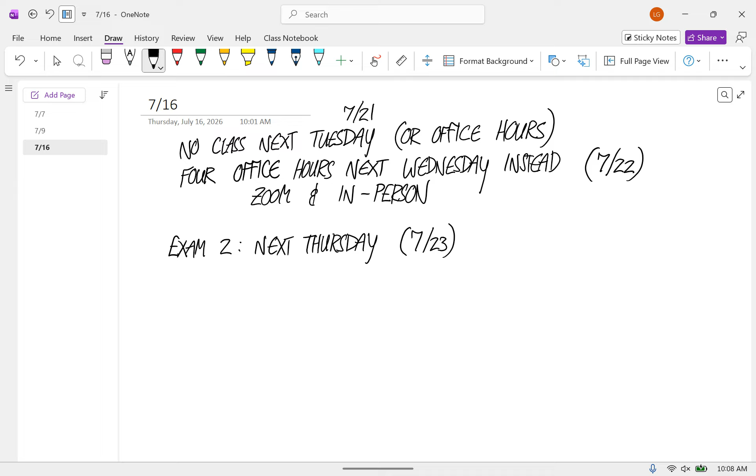So the first thing I want to do today is talk about the test, and I'm going to go through all the test questions. And then I want to take any questions you have on homework, go over any problems you'd like me to go over on the homework, and then we'll go through a bunch of example problems.

So exam 1, basically overall the scores were lower than I would expect on this. These are lower than usual. It seemed like what I saw most often was just people not putting in the time to absorb these methods as well as you should.

You really can't just think your way through this stuff. I'm giving you methods that are going to work for these problems, and what you need to do is just keep doing these problems and comparing your answers to the solutions until they match, basically. So I'm going to go through the exam problems. I'm going to do it in the method that I prefer. There are other ways to do it, but you can't just think your way through it. You need to follow some kind of method, so you might as well follow mine. The methods I'm giving you are specifically designed to get you ready to do the kind of problems I'm going to give you.

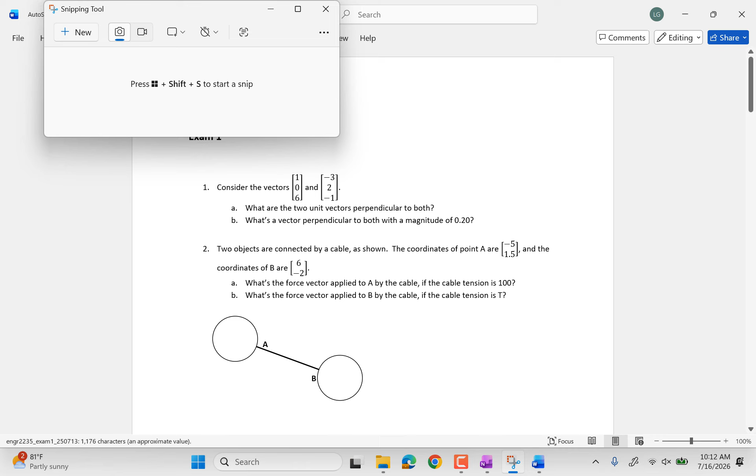Okay, so exam 1, number 1. Well, let me pull these up. So number 1 is just a straight vector question.

We want to find two unit vectors that are perpendicular to both of these. The cross product always gives you two vectors that are perpendicular to both of those, but the cross product itself isn't going to be a unit vector. In order to be a unit vector, you have to divide by the length.

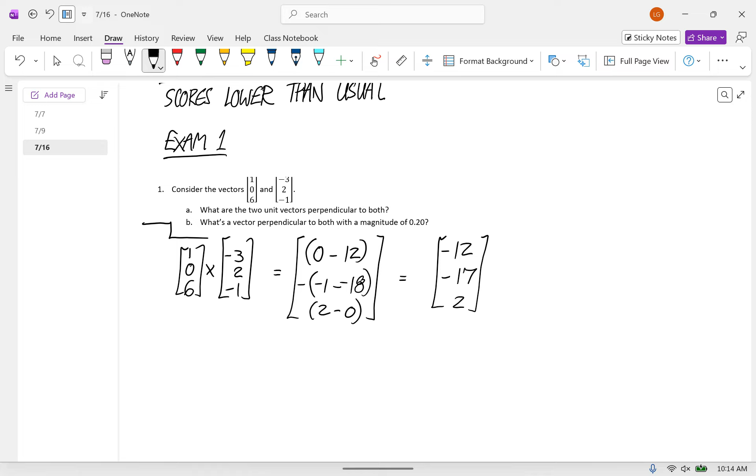So we have 1, 0, 6 crossed with -3, 2, -1. And so that is 0, -12. And then for the y component, -1 minus -18. And then for the z component, 2 minus 0. And so you get -12, -17, 2. Then I'll calculate the unit vector in this direction, and the two unit vectors perpendicular to both of these are this and the opposite.

Also, a lot of people just did the arithmetic of the cross product and got the wrong answer. Your calculators will do this calculation for you. I'd highly recommend, if you have a TI-84 or 86, entering the program given in that statics textbook, and it'll always do it for you—you never have to do it by hand. If you have an 89 or an Nspire, that product is in there, called cross P.

Okay, so the unit vector in this direction is negative 0.574, negative 0.813, 0.096. We want the two, so it would be plus and minus this. So the other one would be the signs of each component switched: 0.574, 0.813, negative 0.096. So that's for part A. And then for part B,

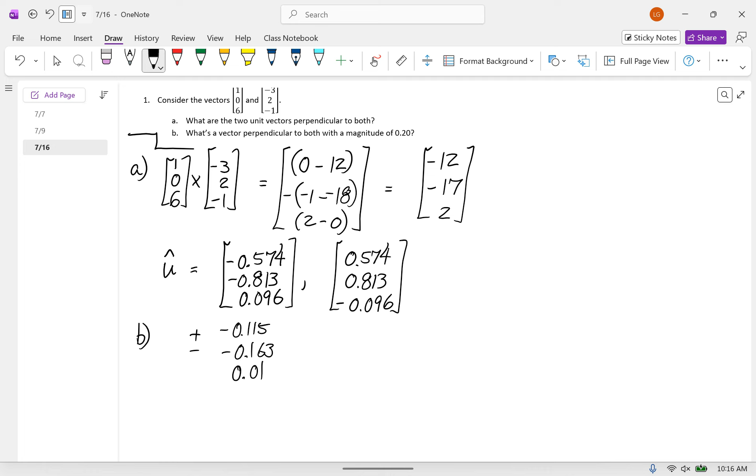And you get plus or minus negative 0.115, negative 0.163, 0.019. So that's number 1. Number 2,

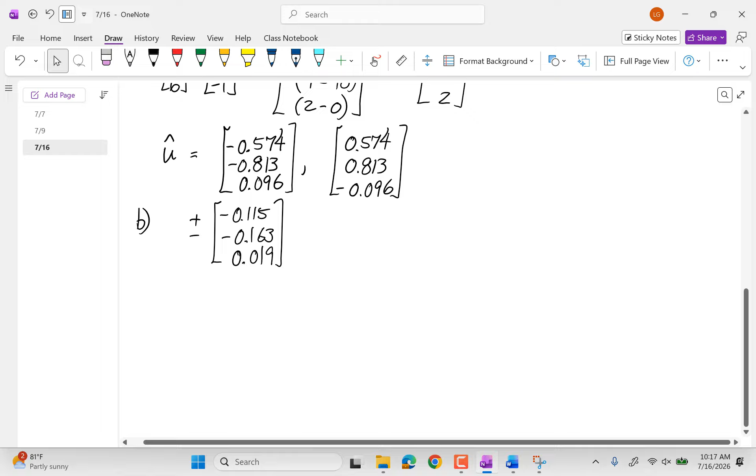we have these two ball things connected by a cable. And we're given the coordinates of the two points. So this point here has coordinates - this is just in 2D, just x and y coordinates. Negative 5, 1.5. And the coordinates at point B are 6, negative 2.

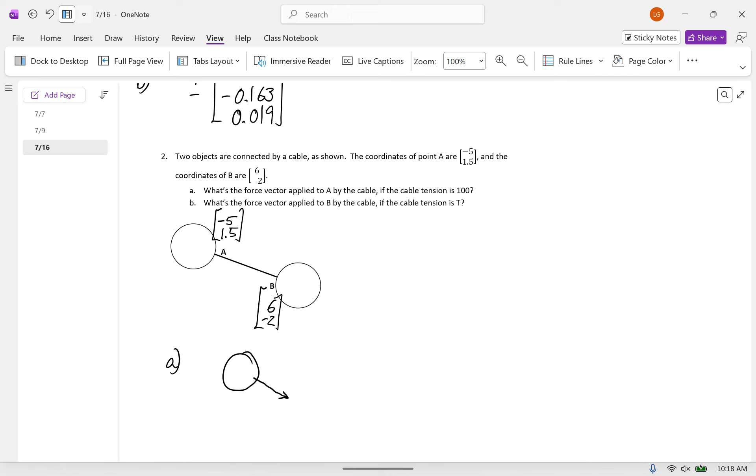And we want to calculate the force vector applied to A if the tension in the cable is 100, and then the force vector applied to B if the cable tension is some unknown T. All right, so for part A, a cable force is parallel to the cable away from the body. So, this way.

And so in order to calculate the unit vector in that direction, because we want the unit vector in that direction so we can multiply it by 100, we're going to go B, the destination, minus the starting point. So our starting vector is going to be 6, negative 2, minus negative 5, 1.5. So that's 11, and then negative 3.5. And if you think about the direction of that vector, it makes sense with the way that arrow is drawn. It's in the positive x direction and the negative y direction.

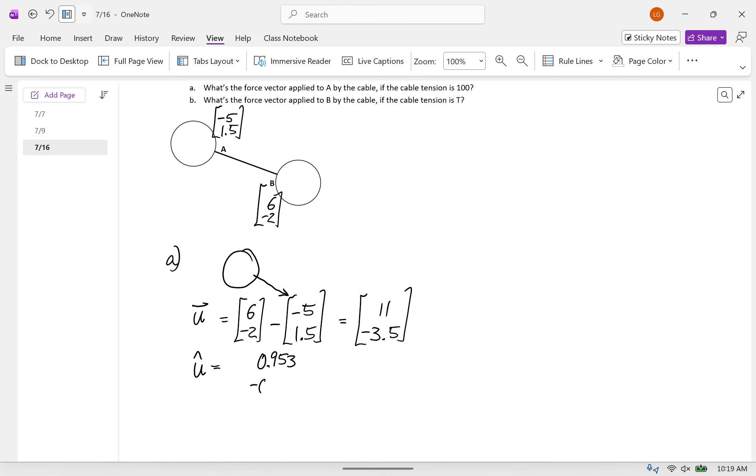And then a unit vector in that direction, divide by the magnitude. And you get 0.953, negative 0.303. And so the force vector that we're looking for here, it says that the tension is 100, so it's just going to be this multiplied by 100. So that's 95.29, negative 30.32. And this is in newtons.

By the way, about rounding, I don't care about rounding. I'm just checking to see that you do the steps right. So however you want to round it is fine with me. I know your chemistry professors will make enough of a big deal about significant figures that I can ignore it.

And then for part B, so now the cable tension is going to be T instead of 100. The other difference is we want the force vector applied to B by the cable, not to A. So this time our force vector is going to be in the other direction. It's still parallel to the cable, but away from the body.

And so our vector this time is going to be, well, if we're starting from scratch, the destination is that point A, -5, +1.5. The starting point is 6, -2. You also could recognize that this is just the opposite unit vector of the other one, and you could skip some of this and just multiply the components by -1. So this gives you -11, +3.5.

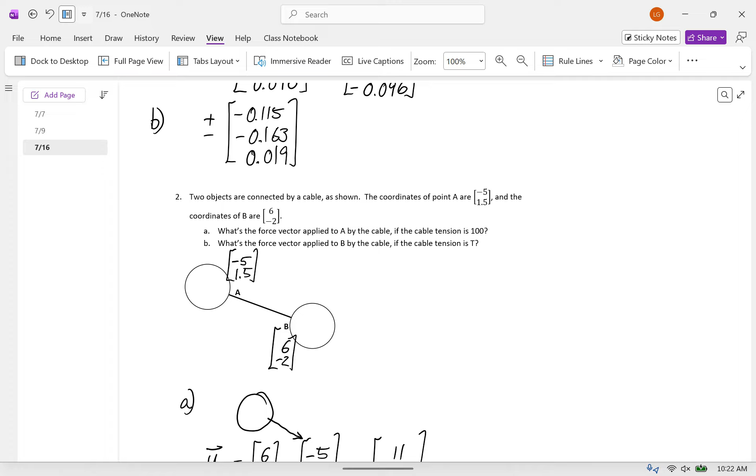And then if you take the unit vector of this, you get the opposite of the unit vector for the first part. So this is -0.953, +0.303.

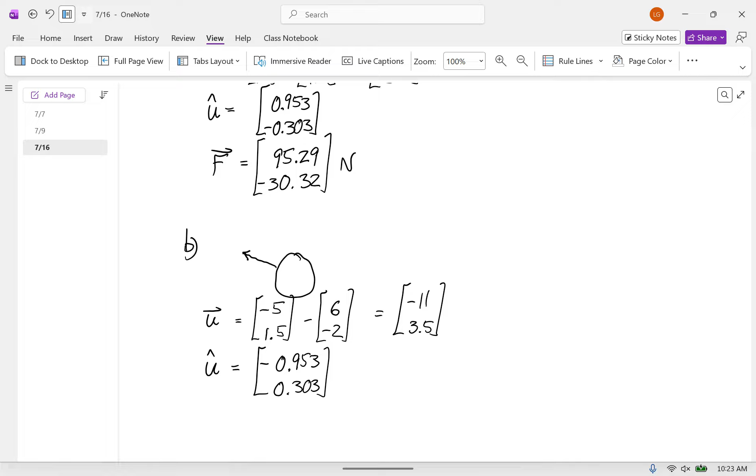If you think about the components, that makes sense for the vector I've drawn here. It's a big component in the -x direction and a small component in the positive y direction. This one was a big component in the positive x direction and a small component in the negative y direction.

And then the force vector, this time we're just going to multiply the unit vector by the variable t. So this is -0.953t, +0.303t.

And that's it for number 2. Anybody have any questions about either of these yet?

Okay, number 3. This is just dealing with coordinates and stuff, but it's in 3 dimensions.

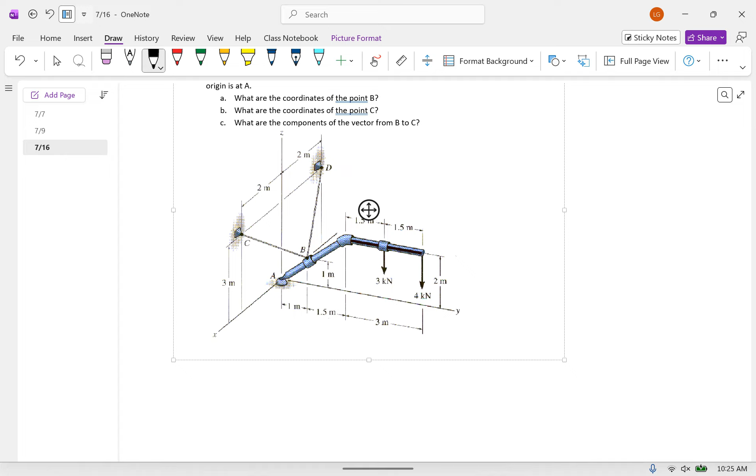So all we have to do is take the distance along each of these coordinate axes, and think about whether it's in the positive or negative direction of that axis. This is the one that people in the class did the best on. Most people did this one right.

So I'm just going to come up with the coordinates of these points. And I'm going to think of these coordinates as vectors because they are position vectors. They're vectors that go from the origin to the point.

So for B, starting from A, we don't have to move at all in the x direction. In the y direction, to get to B, we have to move 1 meter in the positive direction. And then now we're here, and we have to move 1 meter in the positive z direction. So there's B.

Then the point C, starting at A, we have to move 2 meters in the positive x direction. And now we're here. We don't move at all in the y direction. And then we move 3 meters in the positive z direction.

Then the last thing it asks is the vector going from B to C. So we're going to do this as the coordinates of C minus B, the destination minus the starting point. So that's 2, 0, 3 minus 0, 1, 1.

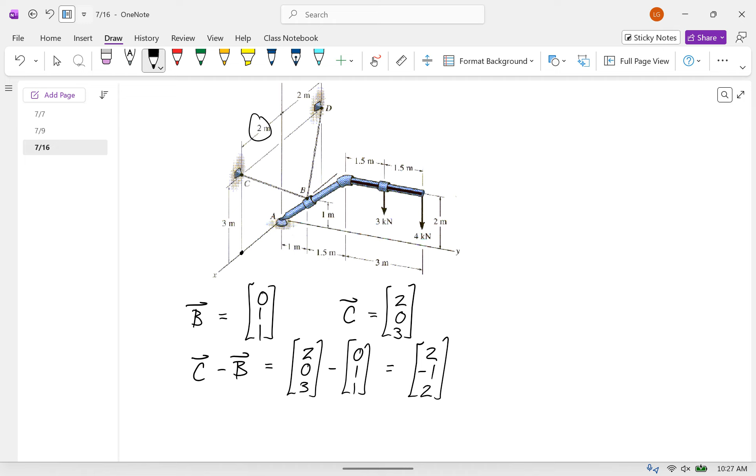Subtracting the components, you get 2, negative 1, 2. And these are all in meters, so the units here are meters for that vector.

Okay, so now we get into the two that are particle statics. The rest is all just kind of vector setup stuff.

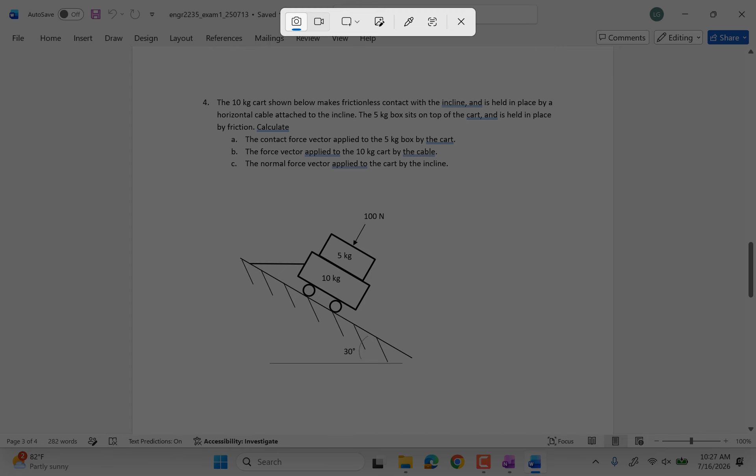So we have this object, and we want to calculate the force vector applied to the 5 kilogram box by the cart, the force vector applied to the 10 kilogram cart by the cable, and the normal force applied to the cart by the incline.

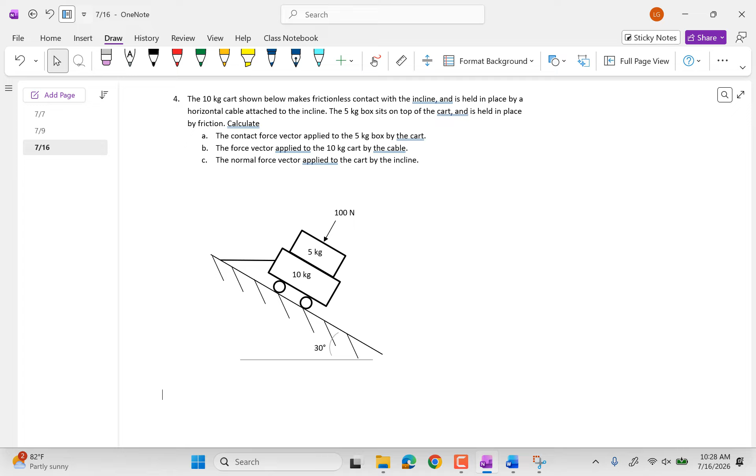There's no order of things that you have to do, but in this class, the way you're going to want to approach it is you're going to want to do free body diagrams of each body and use Newton's second law. When we get into rigid bodies, you'll also use the moment equation, but use Newton's second law for each one of those bodies. So I'm going to just start with the 5.

There's no reason that has to be the first one, but my free body diagram of the 5 kilogram, we have a weight force that goes straight down.

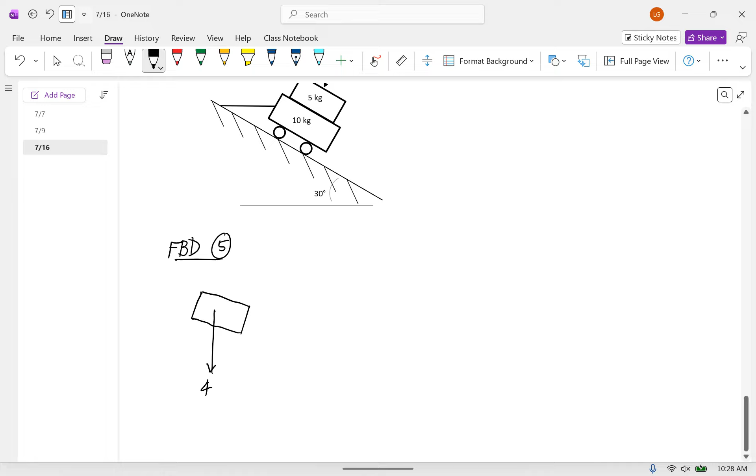We have a 100 Newton force that's not straight down, it's perpendicular to the surface. And if you keep going around the boundary looking for contact, the only other place is the contact between the 5 and the 10. There's a friction contact. It says that in the problem between the 5 and the 10.

And so a friction contact, you're always going to represent that as an unknown force vector. So it has components like this, and it doesn't matter what you call it. I'll call it R.

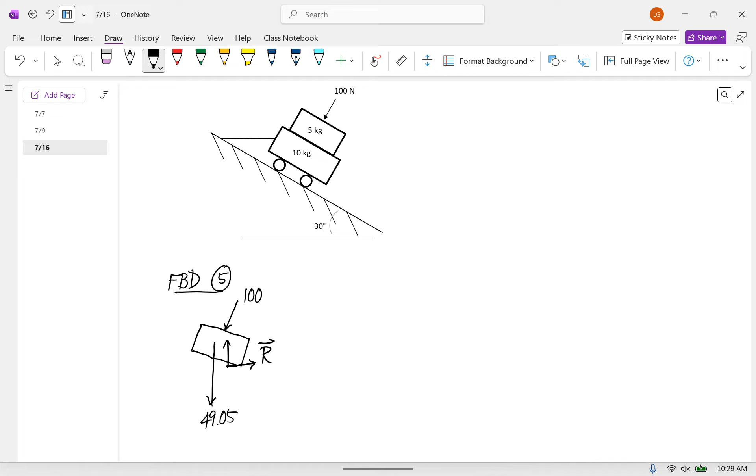And now we can write out Newton's second law. The two easy ones to write out are 0, negative 49.05. I'm not rotating the coordinate system or anything. I'm just, through this whole problem, going to use a standard coordinate system.

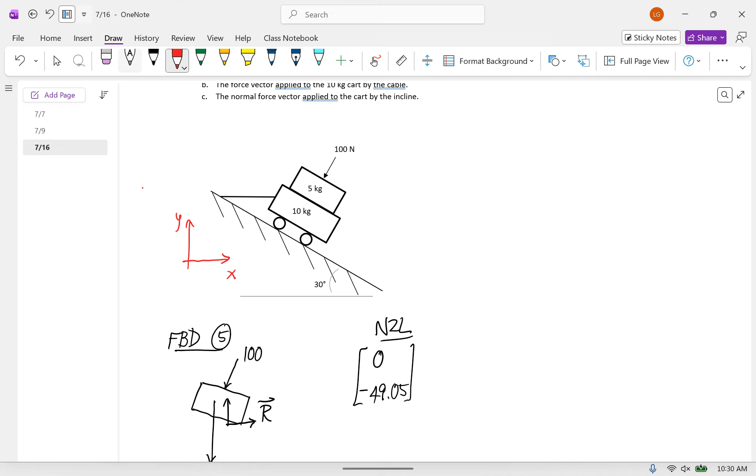And then we have Rx, Ry. That's two unknown components. And then the 100.

What do we know about the 100? Well, you can imagine, like one way you can think of it is, imagine that this incline is on a hinge. You can rotate this incline. And imagine it starting flat and then rotating 30 degrees like this, okay? As you rotated it, that perpendicular force would start out vertical and then slowly turn this way 30 degrees. So that's one way to kind of reason it out.

The way I like to do it is, I've done this in class at least one time before. It takes a while to get used to this way of doing things. But just go based on what you're given and just keep hopping around with the angles. And once you're in the vector direction that you want, then you can just add up all the angles.

So what I'm going to do is I'm going to say, okay, first of all, we're given that a vector going this way makes a 30-degree angle with this. Okay, that's what the picture gives us. And then we want something perpendicular to that, facing down and to the left. So I'm going to now draw a vector like this.

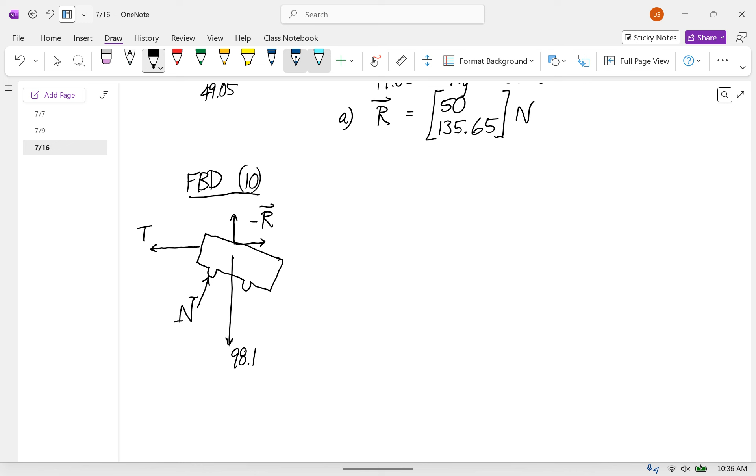Yes? If you had, just like theoretically speaking, what if you had like A as negative instead of positive? Yeah, then that's fine, then you write it as positive A, like if you had positive A, negative A in this one. Like if you had like -50, -135.65. Just theoretically speaking. Like, and then for the second problem, we had it the opposite sign. Mm-hmm, it's positive, right. That's right, yep, you always just whatever the components are, you multiply by -1. I'm saying like, what if your coordinate system where the x and the y were in a different direction, basically. Yeah, probably, I'm just throwing out. Well, yeah, then you would do this. But if your coordinate system is the one I've drawn, and you got -50, -135, then that's wrong, and your bridge falls down. But your bridge falls down if you build it like that. But if you do that in my class, you probably get 1 point off. So bridges are much less forgiving, yes, much less forgiving. So if we did the opposite coordinate system, we got it right still. Oh yeah, for sure, if you did the opposite coordinate system, your numbers would all look different. But if they made sense in that coordinate system, then that's right. A lot of times in these tests, I'll specify a coordinate system so that I don't have to grade a million different, do this calculation in a bunch of different ways. But yeah, you pretty much always have freedom to choose your own coordinate system. In that sense, bridges are more forgiving. You always get to choose your own bridge coordinate system. In my class, sometimes I make you choose one.

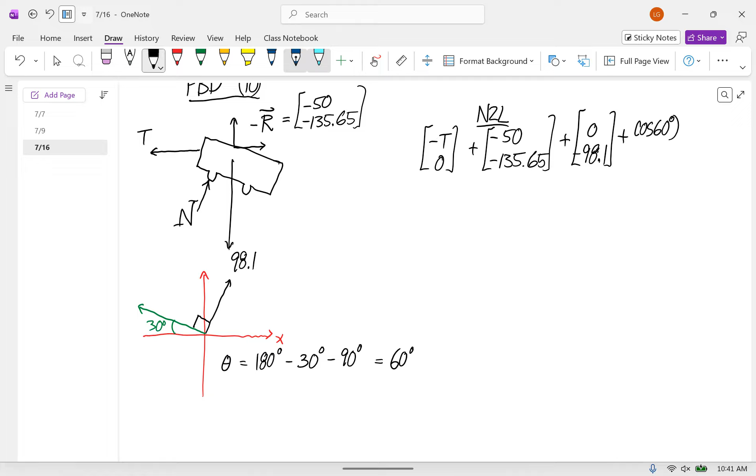So we have cosine of 60 degrees times n, sine of 60 degrees times n. That's all the forces.

And so our two equations: the x equation says negative t minus 50 plus 0.5n is equal to 0. The y equation says negative 135.65 minus 98.1 plus 0.866n is equal to 0.

And that's a system of two equations that you can solve by substitution, or it's easy to solve using reduced row echelon form. I'm going to show that again. This is going to be important for us later on when we get more variables in our systems.

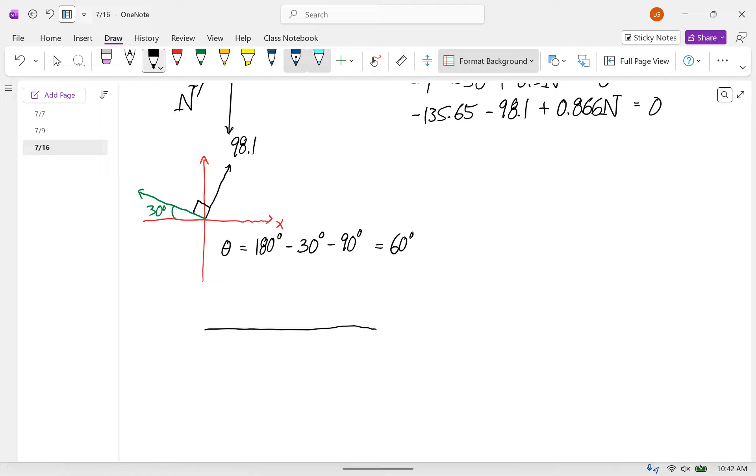Okay, so we have two equations. Those are the two rows. We have two variables, I'll make that t and n. And then this is the constants. Remember that you have to move the constants to the other side of the equation from the variables. So we have, for t, a coefficient of negative 1. For n, a coefficient of positive 0.5. For the constant over on the other side, we have positive 50.

And then for the second equation, for the t's, we have 0. For n's, we have 0.866. And get the constants over on the other side, and you get positive 233.75.

And now if you solve this, I'll just do this real quick. So we get T is equal to 84.96. N is equal to 269.92.

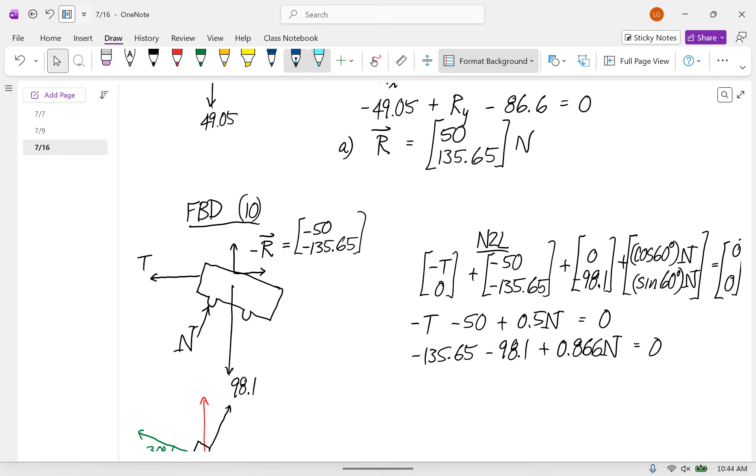Okay, that's almost the answer, but I asked for this in a very specific way. So what's the force vector applied to the 10 kilogram by the cable, first of all? We know the tension in the cable, but we want the force vector applied to the 10 by the cable. So you can go to Newton's second law for the 10 kilogram cart, and you know that that force vector is already written in here. And this is what we want.

So now all we have to do is plug in our variable value for t, and we get that the force on the 10 by the cable is equal to negative 84.96, 0, and the units are newtons.

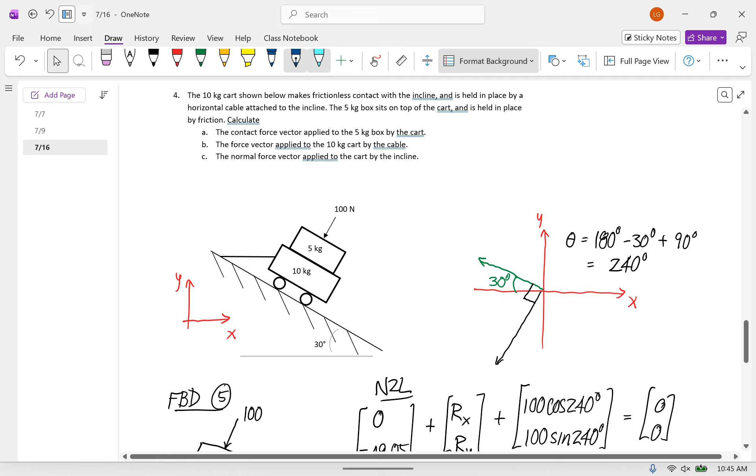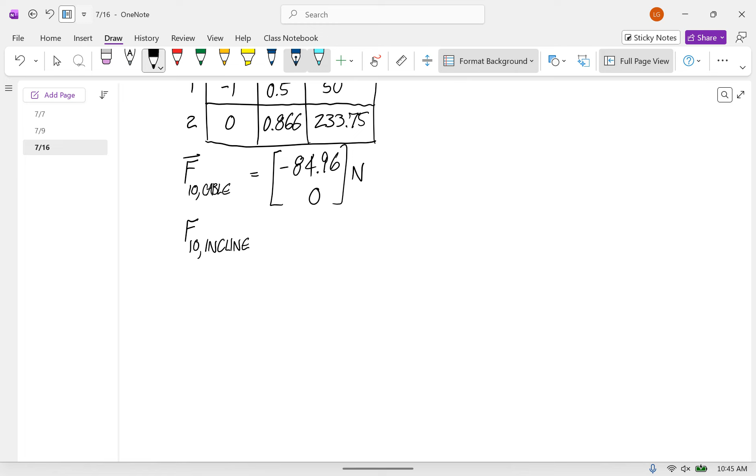And then it asks for the normal force applied to the cart by the incline. Again, this is applied to the cart, so we'll go to Newton's second law for the cart. And the force we want this time is this one. And so the force on the 10 by the incline is equal to 269.92 times the cosine and sine of 60 degrees, which is 0.5, 0.866.

And that is 134.96, 233.75. Yes.

Suppose we didn't have a calculator to calculate something like 3x3 or whatever. I mean, you give us 2 hours. Although, it would have been fine on this test, but not too long from now, especially in this class, this accelerated schedule, we're going to have big systems of equations, systems of 9 equations for 9 variables or whatever. You don't want to do that by substitution. So you kind of expect us to know how to do it with a calculator?

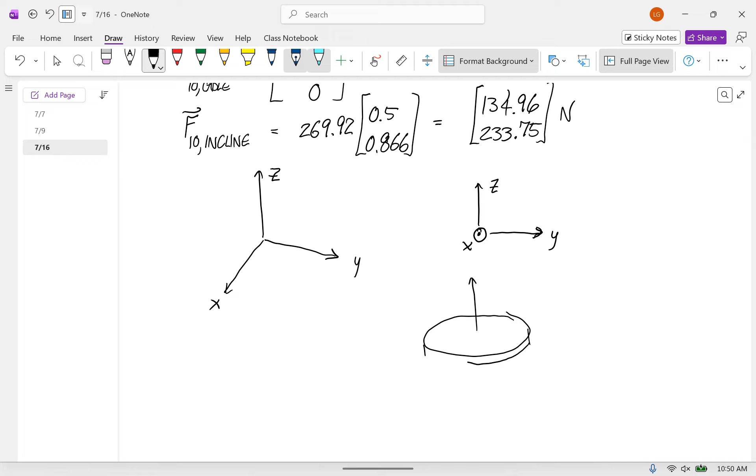It's a little easier to picture if you think of it straight on. X is coming out towards you, y is going over here, and z is going up. So think of your fingers starting in the direction of x, curling until they're in the direction of y, and whatever position your thumb puts your hand in. Remember the medallion, you can always make this medallion, and then you never have to try to use your hand again. It's cool looking too, it's a conversation starter at family reunions.

Okay, and then the last one is the pulley problem.

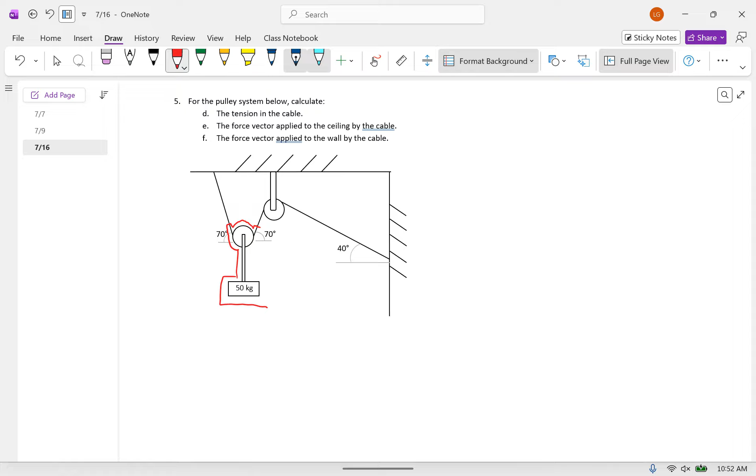So for my free body here, I'm going to take all of the cable underneath the pulley and the mass. So everything inside that red outline is going to be my free body. You don't have to draw the bat ears on it or whatever, but I think this makes it a little more clear what I'm including, because this doesn't work if you don't include that bit of cable that goes under the pulley.

So you have 490.5 here, and then you have a cable tension pulling on the excluded cable pulling on the included cable, and then same thing here in a different direction. Notice this angle is 70 degrees, and this angle is 70 degrees.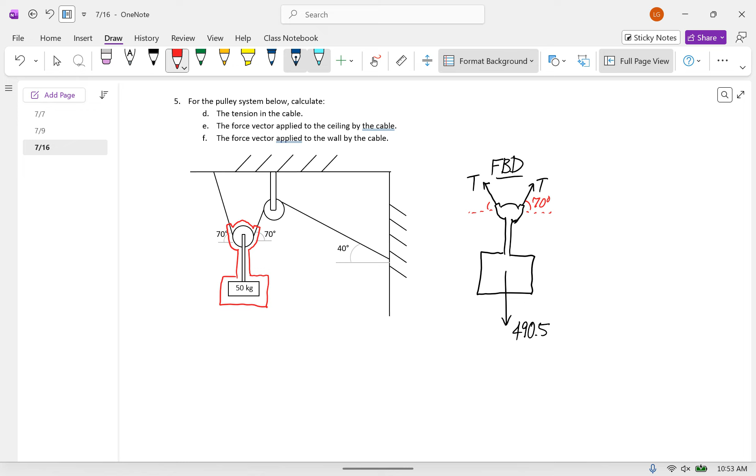So Newton's second law, we can think of this as, well, it's 0, negative 490.5, plus t times the cosine and sine of, this is 70 degrees from 180, so this is 110 degrees. Or, of course, you can always just draw out a right triangle and do the trigonometry and then adjust the signs by thinking of what quadrant you're in. That always works perfectly fine, this is just kind of a more algorithmic way to do it. And then the other one is t times cosine and sine of 70.

And I'll rewrite this whole thing. You get, so 0, negative 490.5, plus, this is negative 0.342t, positive 0.940t. This one is positive 0.342t, positive 0.940t, it's equal to zero.

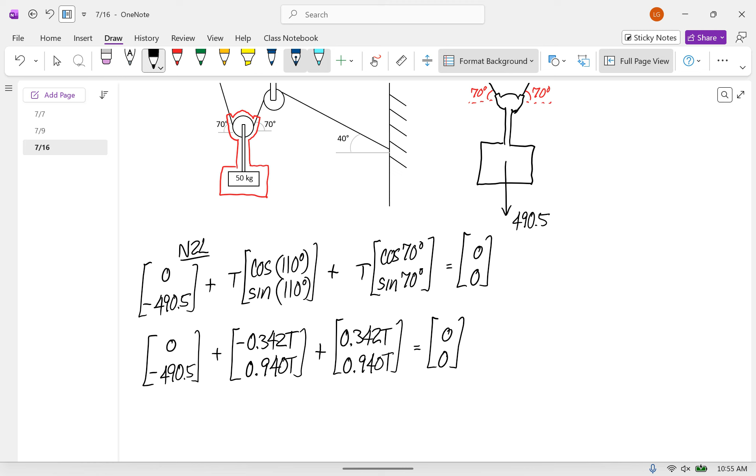Now you can break it up into an x equation and a y equation, and you see that the components in the x equation cancel out, and you just get 0 equals 0, which ends up being a useless equation. But the useful equation is the y equation that says negative 490.5 plus this is equal to 0, so t is equal to 260.9 newtons.

A cable can't push on things, it can only pull on things. So when you draw your free body diagram according to the rules of cables, you're prescribing the direction that you know it is. So if you ever get a negative answer for a t value, something went wrong and you should go back and inspect what you did. This should always come out positive.

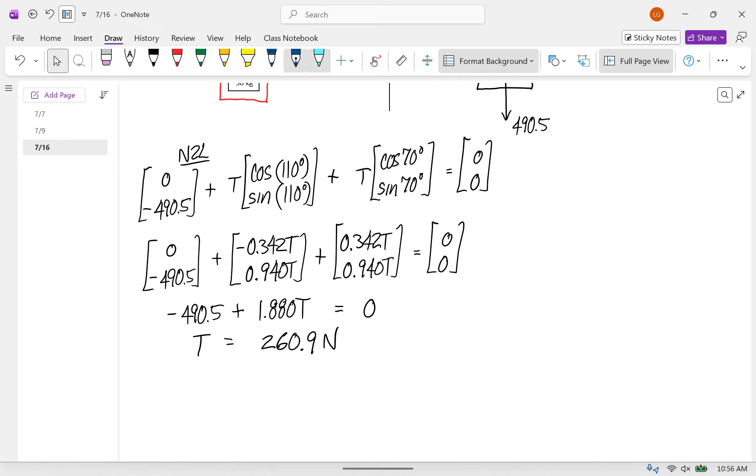Okay, so now we got that tension. That's our answer for part A. Now it asks for some force vectors. The first one is, what's the force vector applied to the ceiling by the cable?

Well, if this is the ceiling, the force applied by the cable to the ceiling is in this direction, where this angle is 70 degrees, and the magnitude is 260.9.

So you can calculate that force as 260.9 times the cosine of negative 70, and the sine of negative 70. That gives 89.23 and negative 245.25.

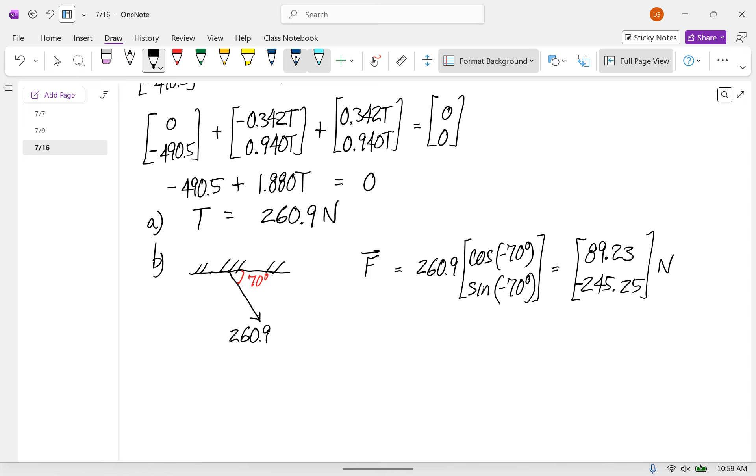If you calculated now the magnitude of this force vector, what would you get? 260. Yep, exactly. So that's the benefit of unit vectors. The magnitude of this is 260.9, it's just that it's in the direction 70 degrees below the horizontal.

Now we have to do the same thing, but with the wall. This angle is 40 degrees, and the magnitude is 260.9 because it's still the same cable. To find the angle for this, you could think of going counterclockwise 180 and then backtrack 40, so you get 140. So this force vector is equal to 260.9 times the cosine and sine of 140.

And so that is going to be negative 199.86, 167.7. Randomly using sig figs in a way that would enrage all chemistry professors. Any questions about that?

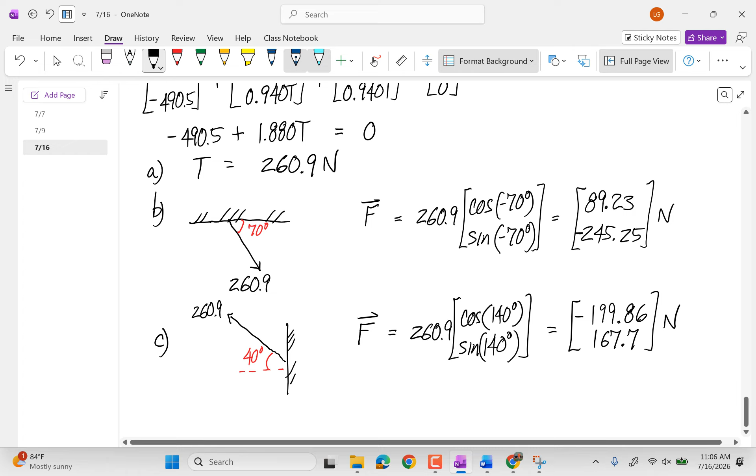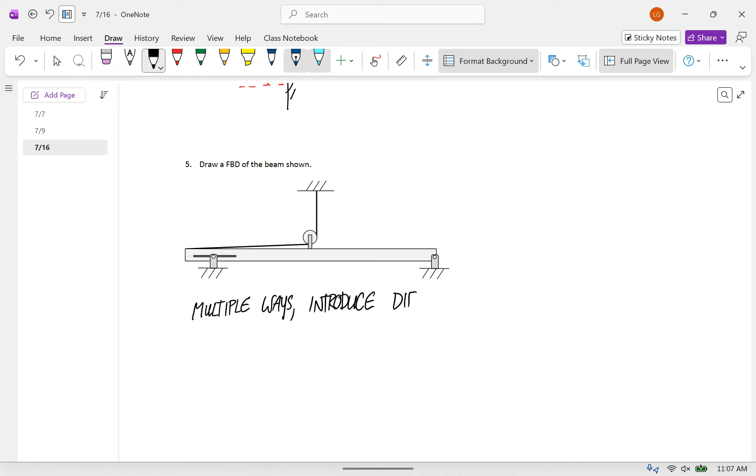There are multiple ways to do this, and they introduce different numbers of variables. You always want to choose the way that introduces the smallest number of variables. If you did this another way, that's fine, you'd just have more variables—for this problem they're all equal. But when solving these problems, if you can reduce the number of variables, that's good, because we're always in a race between variables we're solving for and equations we have from Newton's laws. If you have more variables than equations, you're stuck, but if you have as many equations as variables, you have a system you can solve.

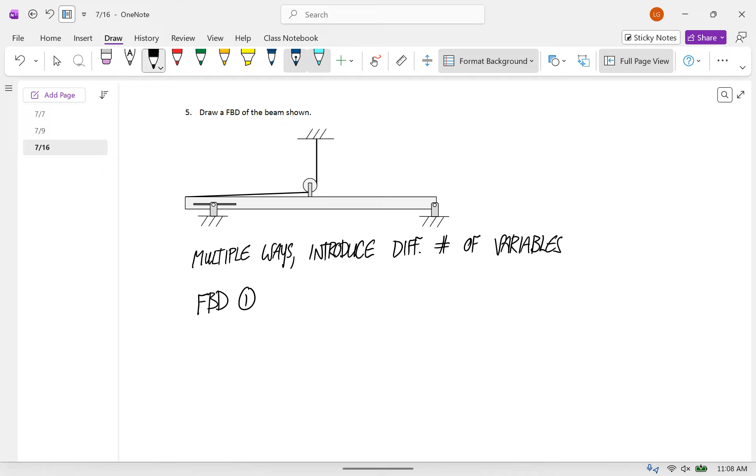So the first way you could think of this—it all comes down to what we're choosing as our isolated body. First I'm going to do the most obvious one: I'm going to just isolate the beam.

I don't remember if it said to neglect the masses, but I'll assume this has a mass, so I'll put the weight going down. The weight always acts at the center of mass of the object, so for these simple shapes it's just right at the middle. Now we'll mentally go around the boundary looking for contact with the surroundings.

There's a joint here—that's a pin and slot joint. If everything else was removed, what kind of motion would this allow? Before we introduce joints, this thing is free to translate along X, translate along Y, and rotate around Z, staying in the plane.

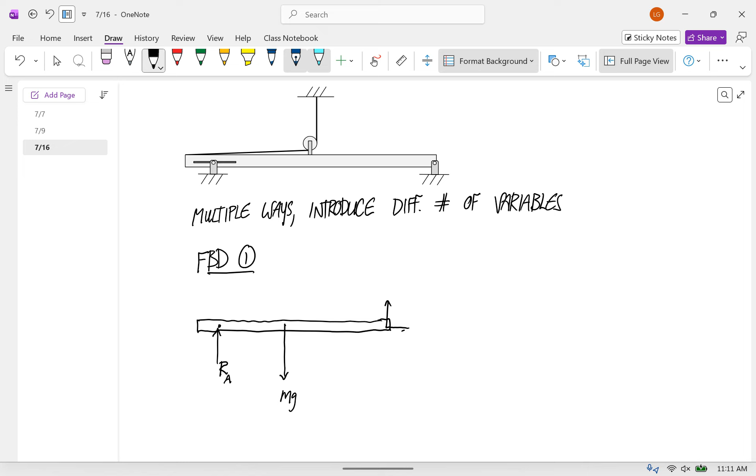Now we'll go over to the other one. I'll call this RB - that is a pin joint. The rule for pin joints is an unknown force vector. So I'm just going to draw my component directions, and I'll give this the vector variable name RB. It doesn't matter what you call those variables, but it's important that that's a vector variable, and this is a scalar variable.

Okay, let's reason this out. Does it make sense that this has a force component along X and along Y? For each one of these joints, forget about the other stuff going on and just think about the only thing here - that pin joint. That pin joint keeps the point on that body from translating along X. It keeps it from translating along Y, but it still would allow it to rotate around the pin. So we have two force components, but no couple.

Okay, now here's where it gets to be a mess. There's also a joint between this beam and the base of the pulley, which is a fixed joint. It's welded there - this thing can't rotate or anything. So what's the rule for a fixed joint? We have a full unknown force vector, and it also doesn't allow rotation, so we have a couple also. So here we have a force vector.

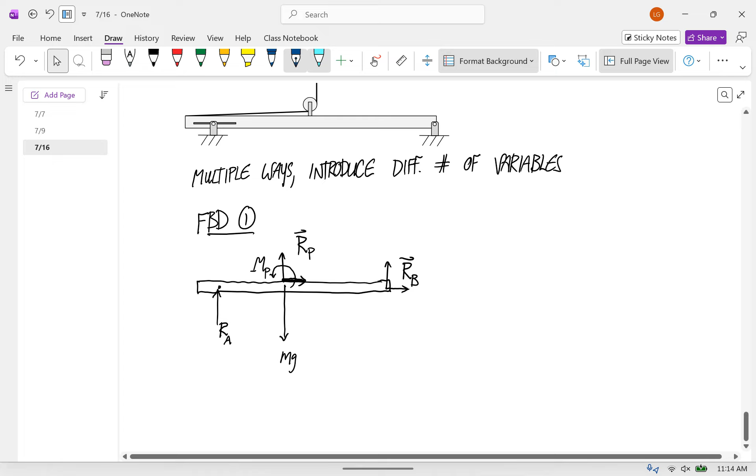Okay, now we keep going around the boundary and we get to where the cable makes contact with the body. So that cable is applying a force away from the body, parallel to the cable, so like that.

So how many variables do we have? These are both scalars - one, two, this is a scalar, three, we're assuming we know mg. So three variables. These are both vectors, so two and two. So we have seven variables, and this is just a single rigid body. So we can't yet solve this.

Okay, so this would cause us a problem. We would then go and isolate the pulley as a rigid body - we could use that to get three more equations. But this is not the simplest way to do this problem.

So instead, what I'm going to do is isolate this - basically just include that as all of it. Then depending on what you choose as your free body, a lot of stuff that was external loads in another way of looking at it becomes internal loads, and you can skip it.

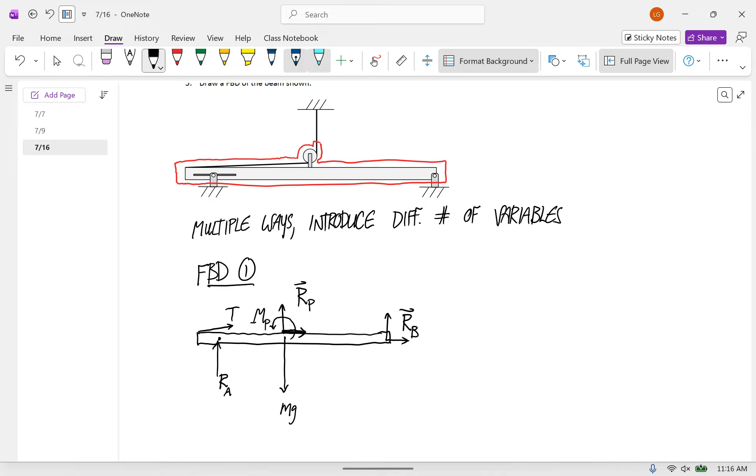Okay, so notice that all this tension stuff going on in this almost horizontal part of the cable isn't there anymore, and this contact between the base of the pulley and the beam is not there anymore. So this is going to be simpler. So, free body diagram, second approach.

Let's see, so we have the beam, and then we have something like that. Okay, most of this stuff stays the same, so this will still be RA. Oh, there's still the weight force mg down. This is still an unknown force vector RB.

But now the couple and this RP applied by the base of the pulley, we don't have to worry about those. The only other place where the surroundings make contact with the boundary is where the excluded cable contacts the included cable, and that's parallel to the cable, away from the body - so like that.

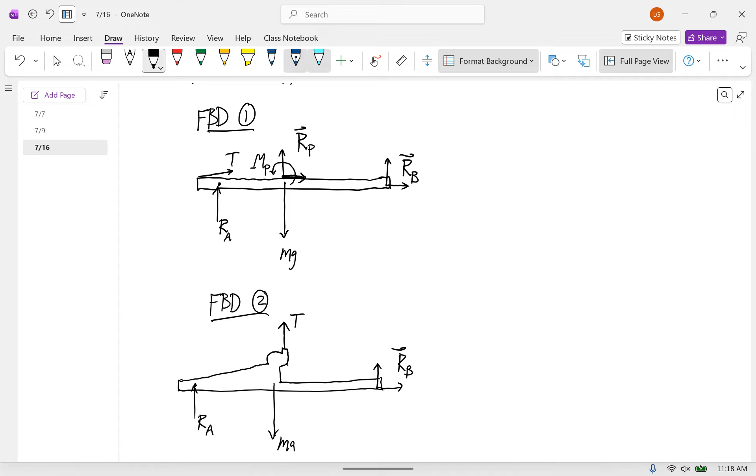Well, we still can't solve that - still too many variables. But this had seven variables; this has four variables.

The reason we can't solve it, if you just look at it, is that it's over-constrained. This thing would be stable without that cable there, or without that pin and slot joint. If you built this thing, nothing would blow up. It's perfectly valid, it doesn't violate any laws of nature. So it's kind of unsatisfying that you can't calculate a solution for that.

Well, you can calculate a solution. It just depends on the microscopic deformations of the materials. That's something that when you take deformable body mechanics, you'll talk about how to calculate statically indeterminate systems. That's what this is. We can't solve it just using statics, but you can solve it.

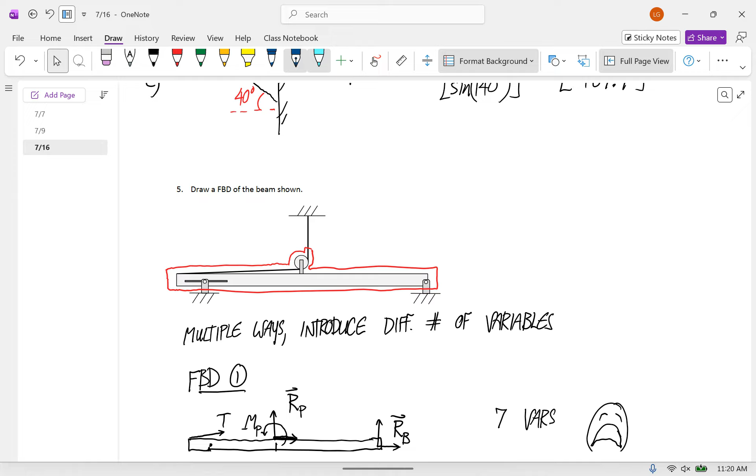Any questions about this one? Yes. What if we included the rest of the string?

Would that be good? At some point, you still have to close your boundary. So if you included all of the rest of the string and nothing else, you would still have the ceiling pulling on the string, and you'd have to include that. And if you said, okay, I'm going to do all of the string and then a little chunk of the ceiling, then you'd have all of the string, and then you'd have a fixed joint between your included part of the ceiling and the excluded part of the ceiling. So there's no way around that.

That's a good question. At some point, you have to close your outline. Any other questions? Okay, any other homework questions you'd like me to go over?

All right, well, let's do some rigid bodies. Let's do some examples.

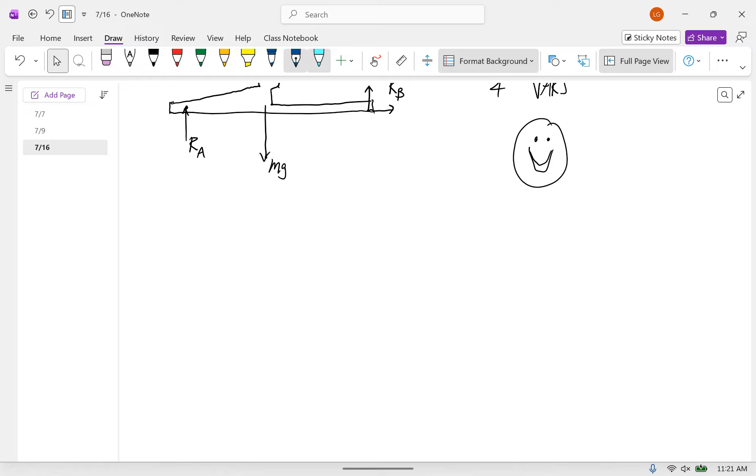Really what we're going to do is start out with free body diagrams like this, and then we're going to do the calculations. And I'm going to do all of these by filling out all of my forces and moments in a table. I think that table is a really nice way to organize stuff. It's something you can look back to. If you have a mistake, you have it all written out there. I think you'll like it if you get used to using it.

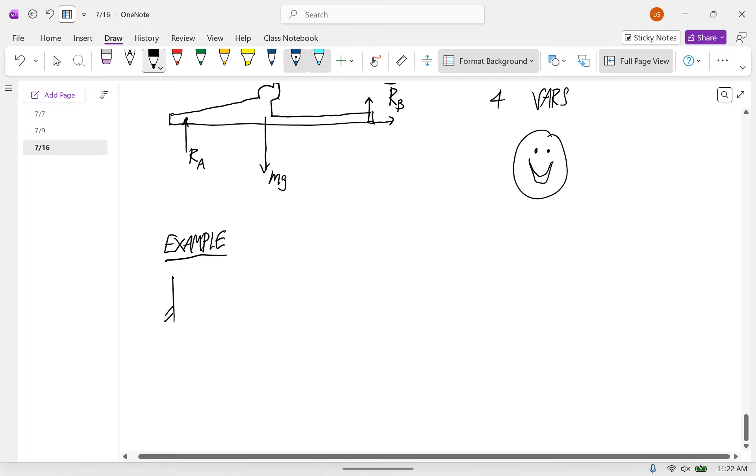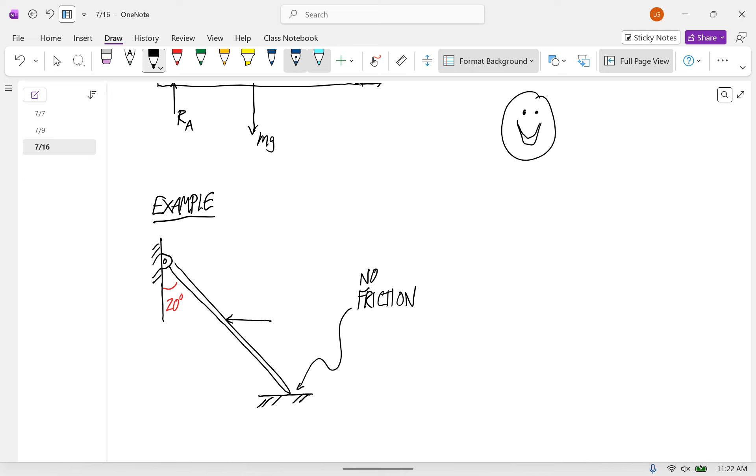So let's say that we have a hinge connected to the wall. And let's say that this bar makes an angle of 20 degrees with the vertical. And then this end of the bar makes frictionless contact, so no friction. And then at the midpoint of the bar, we have a force going to the left of 100 newtons. And let's say that the mass of this bar is 5 kilograms. And we want to calculate the reaction loads.

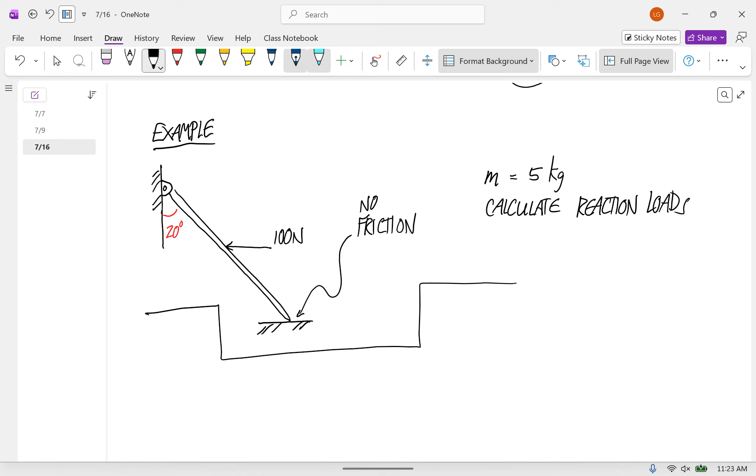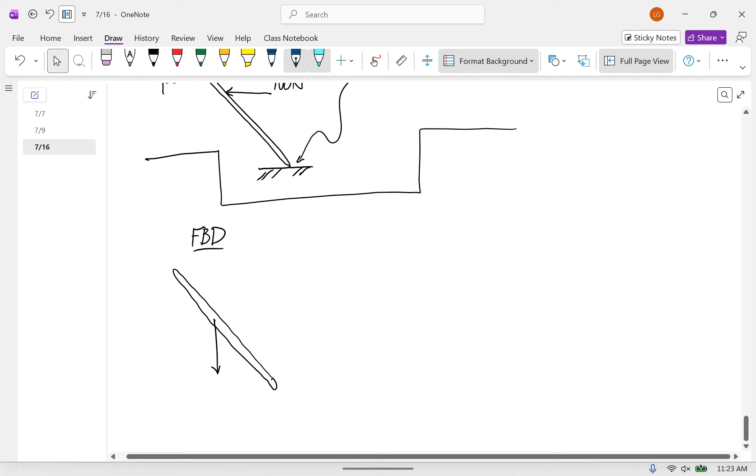I'm going to start out with the free body diagram of the bar. So it was 5, right? So this is 49.05 for the weight. And then we have the 100 that's given.

And now we have to deal with those two joints. Up here at the pin joint or the hinge joint, that restricts translation along X and Y. So that's a full unknown force vector, but it doesn't eliminate rotation, so there's no couple. So we have a full unknown force vector I'll call RA.

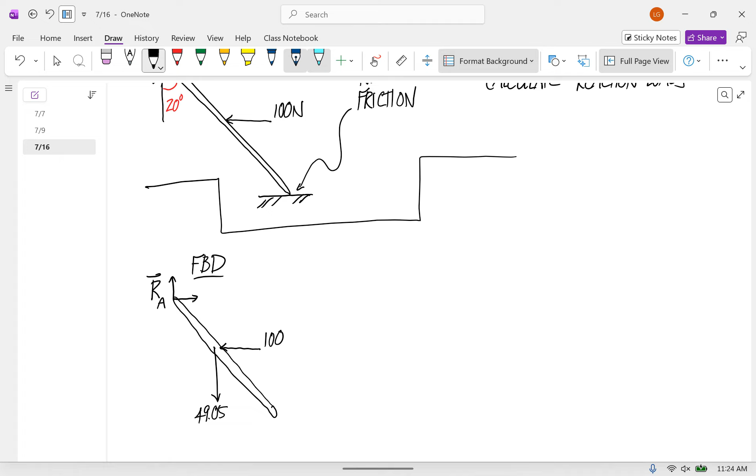And then down here, this is a frictionless contact. The rules for a frictionless contact are, well, we did frictionless contacts with particle statics. This is perpendicular to the surface toward the chosen body. So if the surface is like that, the force is perpendicular to the surface toward the chosen body. Give it whatever name you want. You could call it RB or N or whatever. And so that's a complete free body diagram.

When we're doing two-dimensional problems like this, how many variables can you have? Yeah, that's right, 3. You can only deal with 3 variables if you're in 2 dimensions, because you only have 3 degrees of freedom and you only have 3 Newton's laws. You have X and Y for Newton's second law, and you have 1 component of the moment equation, rotational Newton's second law.

Okay, so I'm going to write out a table. So my first column is rho, my second one is force, my third one is the moment. You might, in solutions, at least sometimes, see 2 columns before the rho vector, a P column and an A column. Well, you can always calculate the coordinates where the force is applied, the coordinates of the about point, and subtract them. I used to do it with 5 columns in here. I don't do that anymore.

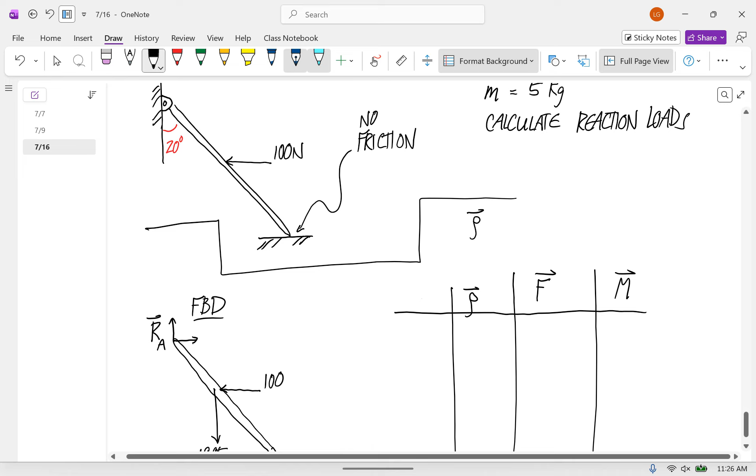You just need to remember the definition of that rho vector. Okay, so remember that the rho vector is the vector from the about point to the force where the force is applied.

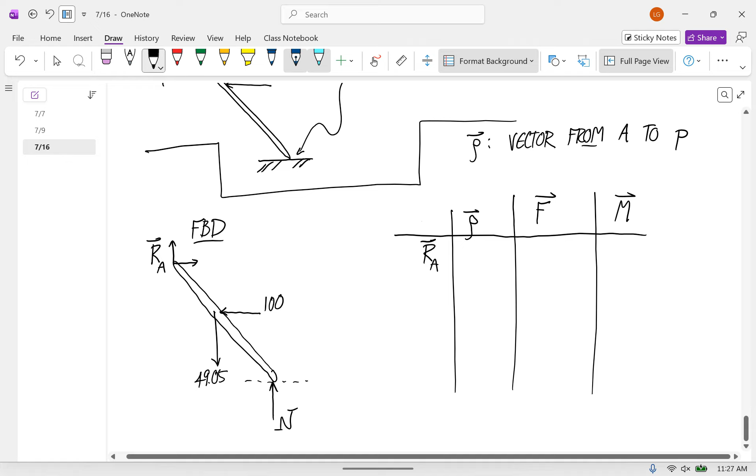Okay, so I'm going to start out with RA. Since the rho vector is from the about point to where the force is applied, we have to choose an about point for this calculation. What do we want to choose? It doesn't matter. If you choose a point where you have the most unknown forces, it simplifies the math a little, but it doesn't really matter. You can just use reduced row echelon form to solve this anyways. I guess I'll choose my about point here.

Ben, you were asking before about differences between dynamics and statics. This is a place where, in dynamics, you have to be very particular about your about point. Your only options are the center of mass of the body or a fixed point. In statics, because everything is fixed, nothing's moving, you can put your about point anywhere you want on the whole problem, on the body, off the body, even a mile away if you wanted, and everything would work out just as well.

Okay, so what's the rho vector for this force RA, that is a vector from our about point, which is the red dot, to where this force RA is applied. What is that rho vector? It's kind of like a trick question. They're the same point, so that vector is 0. Is the benefit of choosing where the most unknowns are? That is right, because then you don't have any moment for that force.

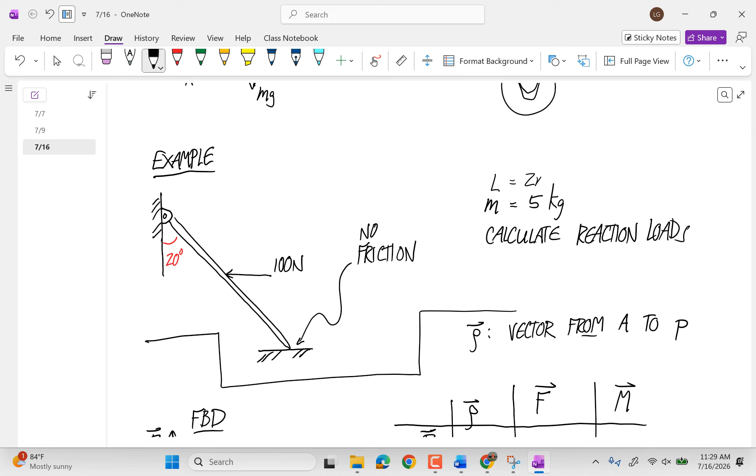Okay, so the rho vector is zeros. The force vector is RAX, RAY. The cross product is this times this minus this times this, gives you a z component because we're in the xy plane. And so you get 0 here for the moment. So yeah, that's the benefit of putting the about point where you have the most unknowns. But now we have to keep that about point for all the other forces.

Okay, so now what about this 100 Newton force? From the red dot, the about point, to the center of this beam, the whole thing is 2 meters. So to here is a length of 1 meter. So we have 1 meter times cosine and sine of negative 70, so this is 0.342, negative 0.940. That force vector is negative 100, 0. The cross product is this times this minus this times this, so that is negative 94.0.

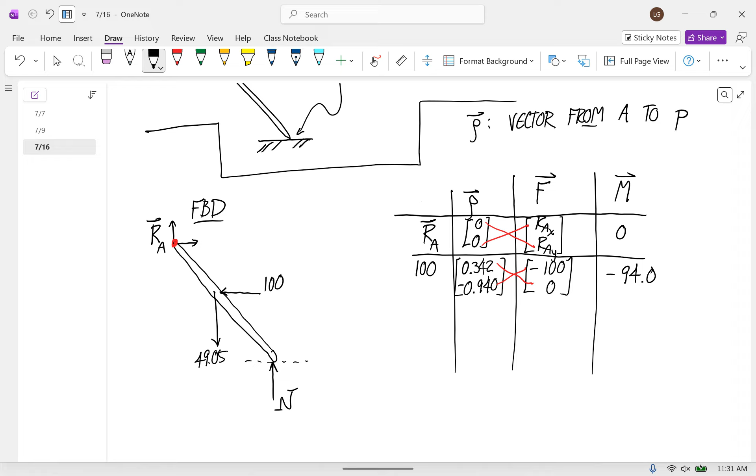Can I ask where you got the negative 70 degrees from? Yeah. Oh, okay.

And now we'll go to the 49.05. Oh no, what are you doing?

Man, you know, when I first started here, I had a computer that didn't have touch sensitivity, it just had a stylus. It never stopped working, it was great. And now, as technology gets better and better, I have more and more crashes. Complexity getting higher. Yeah, more fail points. Right, yeah.

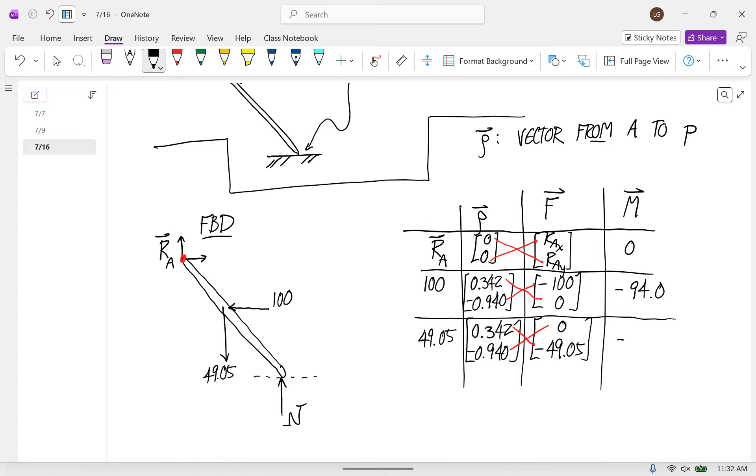Okay, so the next one is 49.05. This force is applied at the same spot, so that means that the rho vector is the same as for the 100. The force vector is 0, negative 49.05. Cross product is this times this minus this times this, and that gives negative 16.775.

And then last is the normal force N. That is 2 times cosine and sine of negative 70 degrees, so that's just doubling both of these components. So this is 0.684, negative 1.880. That force vector is straight up, so this is 0 N. Cross product is this times this minus this times this, so that is 0.684N.

Okay, now we have all of the forces for Newton's second law here, all the moments for rotational Newton's second law there. And if you need to go back and check something, you have it all right in front of you, how you did that calculation. You're going to like having this there.

So Newton's second law says RAX, RAY plus negative 100, 0, plus 0, negative 49.05, plus 0, N is equal to zeros. And then the moment equation, rotational Newton's second law, says negative 94.0 minus 16.775 plus 0.684N is equal to 0.

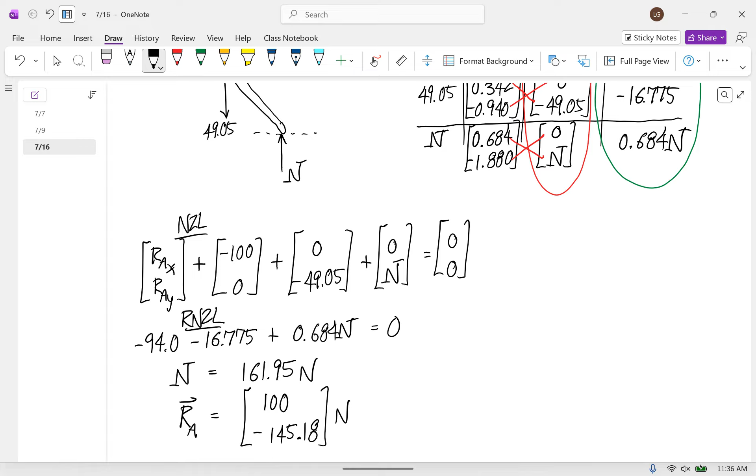So there's the maybe slightly surprising fact that in order to have this in equilibrium with the conditions that we have, this actually has to pull down on the left side. Sometimes you'll get sort of surprising stuff like that.

Let's also think about the meanings of these moments. We chose our about point to be here. So the signs of those moments, and we're still in 2D, so these are Z components of moments that are listed under the moment column. The signs will tell you whether it's clockwise or counterclockwise, the rotation that this force would produce.

So one by one, just isolate the one force you're thinking of. Think of this as the hinge that it can rotate around, and think about whether those forces would produce a clockwise or a counterclockwise rotation. Positive means counterclockwise, negative means clockwise.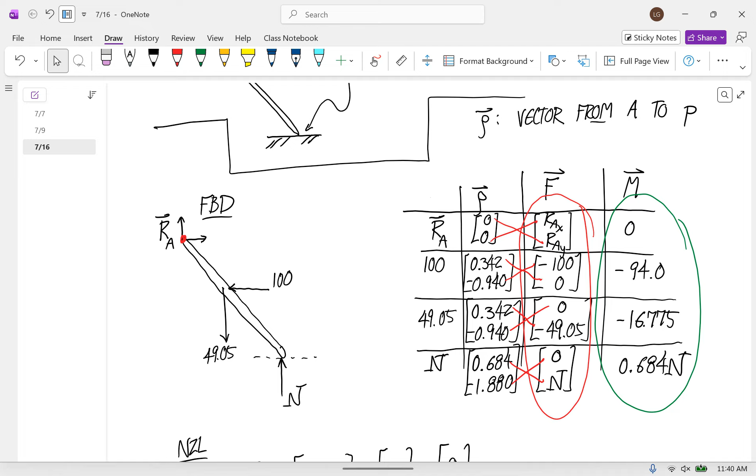Let's do one with a fixed joint. So let's say that we have a cantilever beam sticking out from the wall this way. And we have a 30 Newton force at the midpoint and a 30 Newton force at the end point. The length of this is 1 meter, and the mass is 4 kilograms. And we want to calculate the reaction loads at the wall.

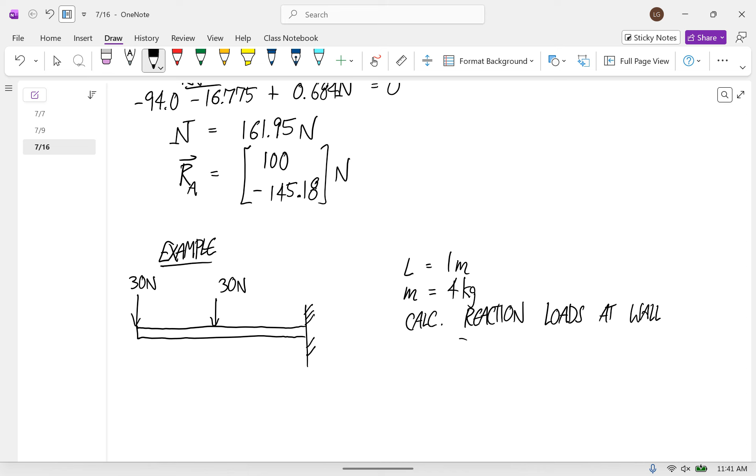Okay, so start with a free body diagram. We have a weight force at the center of 4 times 9.81, so that's 39.24 newtons. We have a 30 Newton force there and a 30 Newton force here. And then the only other place that the body contacts its surroundings is at the wall.

So what kind of loads are applied to a body by a fixed joint? You can sort of memorize that, which is probably for the best anyways, or you can think about the degrees of freedom that are eliminated. This doesn't allow a horizontal translation, it doesn't allow a vertical translation, and it doesn't allow a rotation if that's welded. So we have 2 components of a force and a couple.

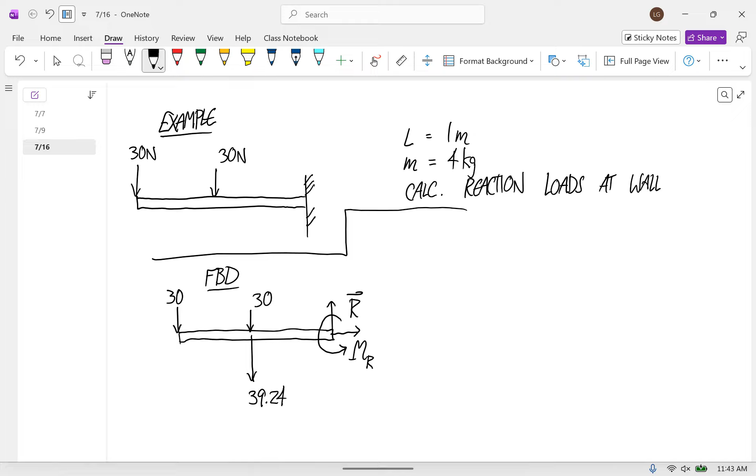So I'll draw the unknown force vector this way. I'll call that force vector R. And then I'll draw my couple like this, and I'll call that reaction moment, M sub R. And then my table, rho, force, moment. I'll put my about point here. Again, it simplifies the math a little, but doesn't matter. You can still, no matter where you put it, if you can solve it with the about point in one place, you can solve it any other place.

Okay, so I'll start with the stuff at the about point. So this R force, what is the vector from the about point to where R is applied? 0, yep. And the force vector is Rx, Ry. Cross product is 0.

Now I'll do the couple, Mr. Well, couples, remember that couples are an interesting thing. They do not depend on the about point. The moment of a couple does not change as the about point changes. Also, couples are equal and opposite forces, so they don't have a net force. Their force adds up to 0. So we can always just cross these out, we don't care about those. And this is just going to be M sub R in the moment.

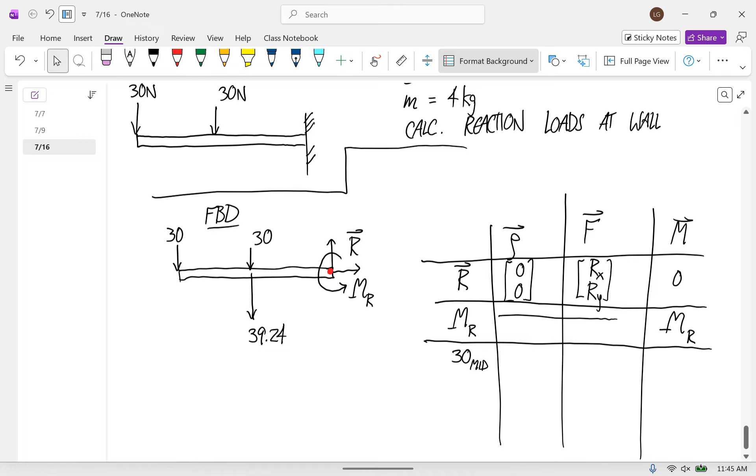Then I'll go to the 30 at the midpoint. This whole thing has a length of 1 meter. So the rho vector, the vector from the about point to that force, is negative 0.5, 0. The force vector is in the negative y direction, 0, negative 30. Cross product is this times this minus this times this, so that's 15.

Then we have the weight force. Since that's at the same point as this 30 we just did, it has the same rho vector. The force is 0, negative 39.24.

The cross product is this times this minus this times this. So that is positive 19.62.

One, two, three, four, five. So we still just have one more to do.

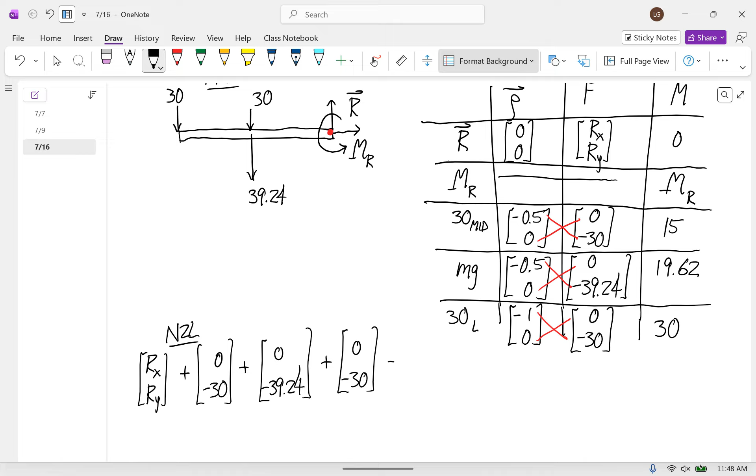Plus 0, negative 39.24. Plus 0, negative 30 is equal to zero. And right away we can calculate that R is equal to 0 for X and positive 99.24 for Y.

And then we'll go to the moment equation. Add up everything in the moment column. So we have MR plus 15 plus 19.62 plus 30 is equal to 0.

So MR is equal to, I think that's 64.62 negative. And the units are Newton meters.

Okay, so you might have kind of a rough intuition about what a Newton is. It's about 4 newtons to a pound. So that's about 25 pounds of force that the wall is applying to the right end of the beam.

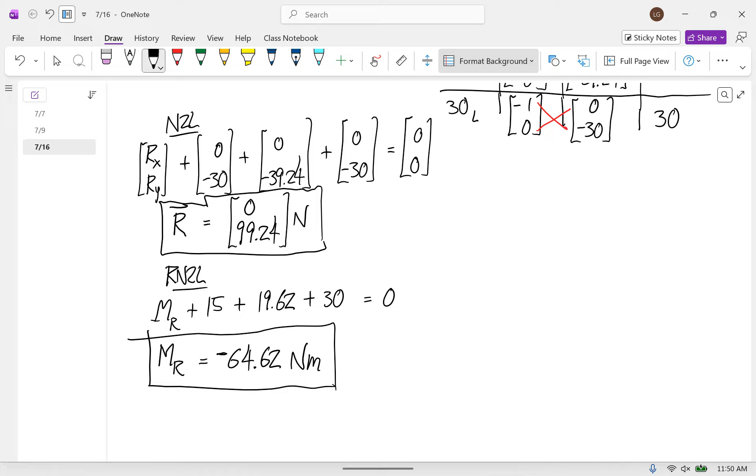But okay, so let's try to wrap our head around it. First of all, let's think about the sign of this couple. Does it make sense that the wall has to apply a negative couple to this beam? Well, all of these externally applied forces are trying to make this beam rotate counterclockwise. And so we would expect that the wall has to apply a counteracting moment that's clockwise.

Anybody have any questions about that? Yes. I was gonna say that it's like if you exerted 64.62 newtons over 1 meter. That's what that means. Yes, that's right.

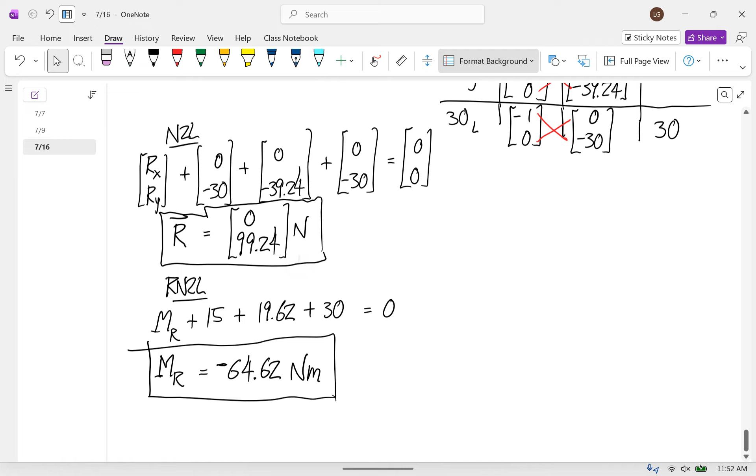Yes. Just one question. I think on the beam free body diagram, for the couple part. Yeah. You wrote they're rotating counterclockwise. Right. Is there, how do you determine? Okay. Yes. So this sign convention can get confusing to people. So just like when you draw your unknown force vectors, you draw them in the positive x and positive y directions.

With couples, draw them in the direction of a positive moment. What that means is if you get a positive answer, this is the direction it's in. If you get a negative answer, it's in the opposite direction. So you just correct it once we solve the problem. It's right, and it's showing it's an unknown force. Yeah, so those are unknown forces, and it's just showing you what the positive direction is.

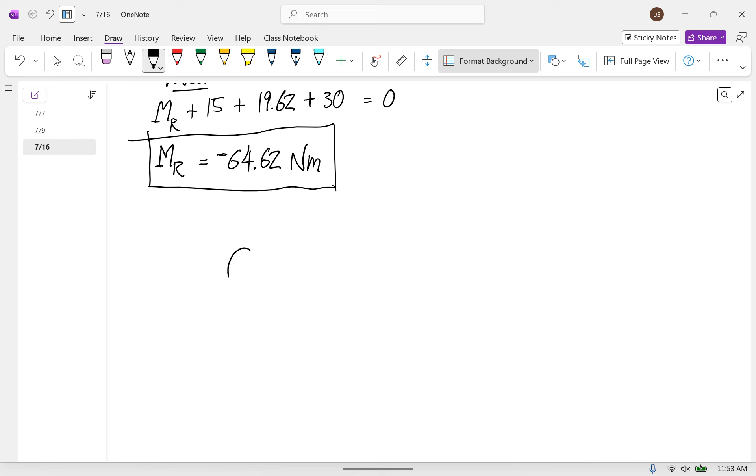Yeah, so think of this. This means the exact same thing as this. Right. Yeah. So like when you calculate your currents or whatever, if you assume a certain current direction and then you get a negative answer, it means your number is right, but the direction was opposite.

Any other questions? Okay, well, I'm going to give you some three-dimensional stuff to watch a video on and some more of these problems. And over the next pretty much 2 full weeks, we'll just be making sense out of this and then applying it to collections of bodies, structures. Okay, that's all.